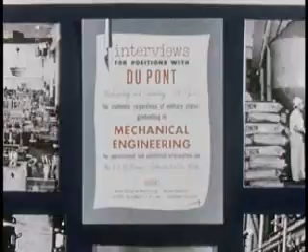This motion picture has been made to help you men who have chosen mechanical engineering as your profession. Perhaps you've considered working for a chemical company. Perhaps, like some mechanical engineers, you've wondered what a chemical company wants with men of your training, whether you'd be working for chemical engineers, or how a mechanical engineer would get very far in a chemical company.

That's why we want to show you something of what goes on at DuPont, where your advancement depends more on your interests and ability than on your field of training.

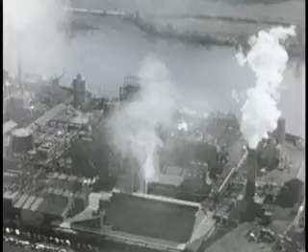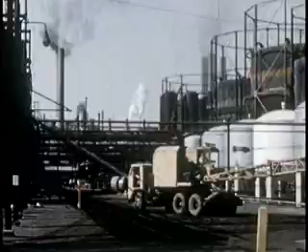Keep in mind throughout this visit to DuPont that the chemical industry is growing by leaps and bounds. Just to give you an idea, at DuPont, in the first 5 years after World War II, over $700 million were invested in the manufacturing side of the business. There are now more than 70 plants in 25 states. No one can tell where the end is, but every year new and more complex products come out: new fibers, new finishes, films, dyes, plastics, agricultural products, just a few examples.

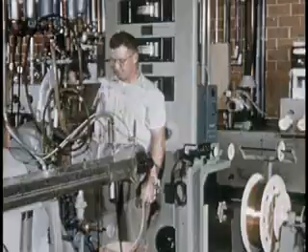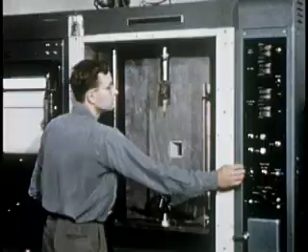Before making any one of those products commercially, a mass of mechanical problems first had to be faced, appraised, and solved. And here's something important to keep in mind: at DuPont, mechanical problems are solved by mechanical engineers. The company does practically all of its own engineering work, right from the very beginnings of fundamental research.

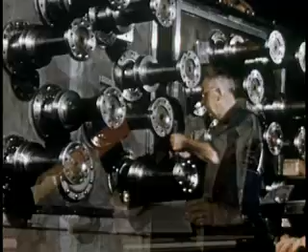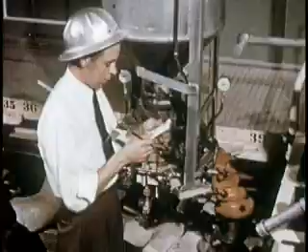It not only develops process equipment, but actually makes a substantial part of it. DuPont men work continuously on ways to improve existing equipment. They design and build the plants, carry on the maintenance, and supervise manufacturing.

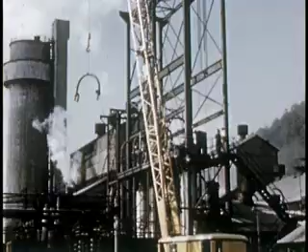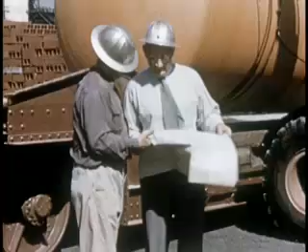Let's consider the opportunities available to you here. Is research and development your special interest? Or machine design? Maybe you're the kind of fellow who goes more for that. How about plant engineering, including power, maintenance, design, and construction? Or production supervision? Perhaps you lean toward this kind of work with its handling of people.

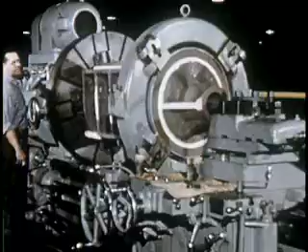Let's start with research and development. Some of the work is done here at the experimental station. A mechanical engineer in this field develops mechanisms used in making the company's products. His work may result in a massive piece of equipment like this, or in a delicate instrument like this one.

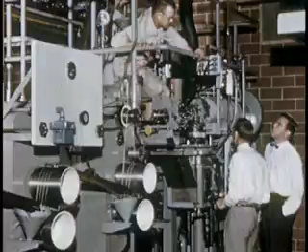There's never been a shortage of problems for research and development engineers. They run into the thousands, actually. They may lead to original equipment to meet new and specific needs, or to improvement of machines already in operation. Let's look at a few examples.

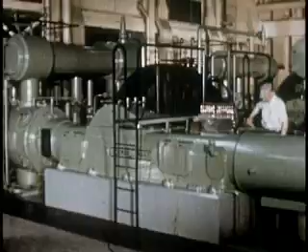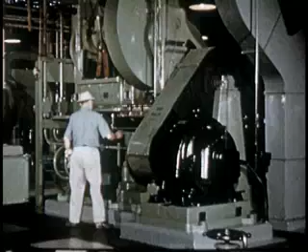These huge compressors are used in making urea from carbon dioxide and ammonia at high temperatures and pressures. Ammonia pumps like this can deliver about 100 tons a day. At these high pressures, machine work, alignment, and assembly are extremely important. Tolerances are severely narrowed as pressures climb.

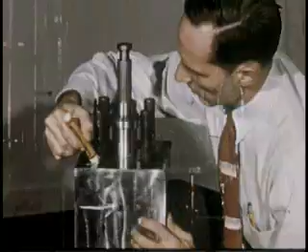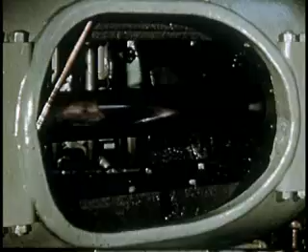One of the secrets of this type of high-pressure work is the action of the pump plunger in the packing. Specification of the right plunger material is essential. High-pressure design calls for great pains to avoid stress concentration, such as might occur in sharp transitions at corners. Pulsations at high pressures cause rapid fatigue of materials and give rise to many design problems that fall strictly in the mechanical engineer's lap.

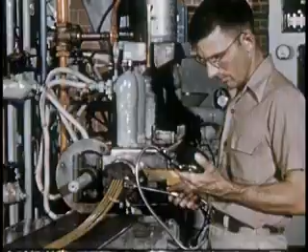Now here's a machine used in the plastics industry. It's called an extractor extruder. It melts plastic, takes the solvent from it, and extrudes it in one operation. To adapt it to DuPont plastics, or to scale it up or down, called for studies in power requirements, heat transfer, and fluid flow.

In other cases, engineers often design and develop equipment for use by DuPont customers. Here are two young engineers working to improve a machine that simultaneously forms and expands a tube of plastic material.

Or a fellow may get into a project that requires work at super pressures. Here's a field that's really challenging, and young too. Behind a steel and concrete barricade, equipment can be tested at pressures far beyond those used in manufacturing today.

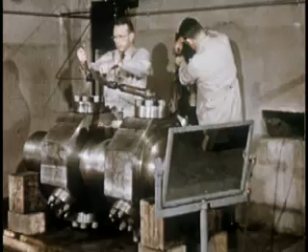After strain gauges have been attached to the test piece and the pressure lines connected, a mirror is placed so that an engineer can observe the results of the test through a periscope on the other side of the barricade.

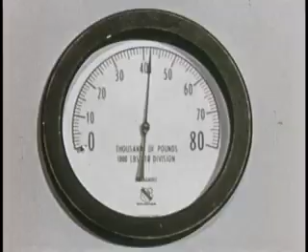There will come a time when pressures far beyond those of today will be used—20, 30, 40,000 pounds per square inch. These men are getting ready for the time when pressures even higher than this may become part of industrial practice.

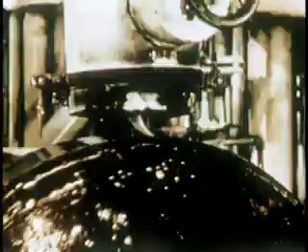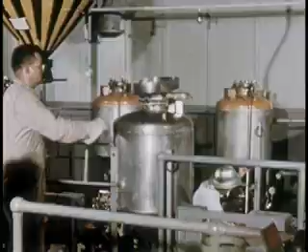When a process or product worked up by chemists moves out of the lab, teams of mechanical and chemical engineers take over. For example, here you see molten nylon being solidified on a semi-works casting wheel at an early stage in the development. Many mechanical problems had to be solved before nylon was produced successfully, and naturally, mechanical engineers had a big part in solving them.

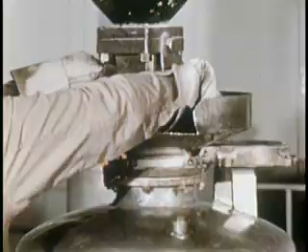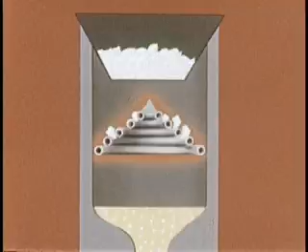Just how would you go about melting nylon chips at several hundred degrees Fahrenheit with as little decomposition as possible? Well, mechanical engineers designed and tried quite a few types of melting grids. Some of them didn't work as well as others, but they finally came up with a grid that did the job.

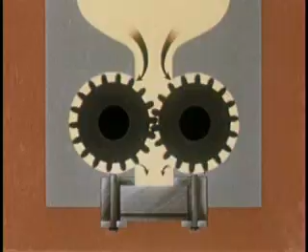Mechanical engineers designed a precision pump that works at pressures better than 1,000 pounds per square inch, but not before they licked the problems of gasketing, sealing, and materials.

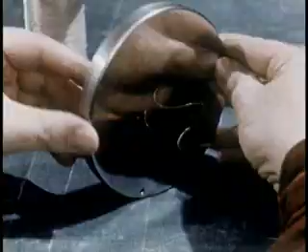The hot melted nylon solidifies into filaments as it is pumped through holes in the spinneret that are almost too tiny to see. Naturally, that spinneret isn't a standard item either. It had to be designed.

Nylon fibers are sometimes wound on these spools at a rate of 1,000 yards a minute. How would you go about winding yarn at that speed without any deviation in yarn tension? Sound like an interesting problem? The fellows who developed this traversing mechanism certainly found it so.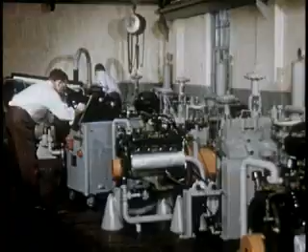Let's move on to this petroleum laboratory to see another important part of development work, activity devoted to improving existing processes and products. Here, engineers are constantly trying to improve the chemicals DuPont sells to the petroleum industry.

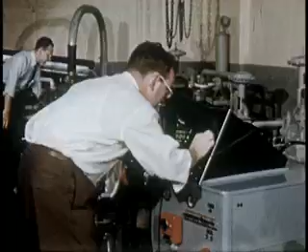Here, engineers are studying exhaust condensates that indicate the effects of tetraethyl lead. Engineers study these things in the laboratory.

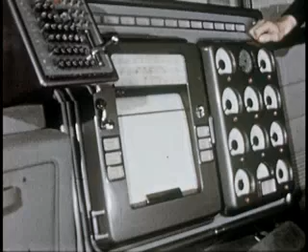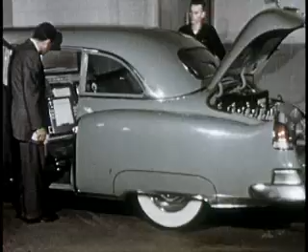They study them out on the road, too, in passenger cars, in trucks, through tests under various kinds of rigid control situations. The instruments in this test car indicate and graphically record information on such factors as horsepower, fuel consumption, speed, spark setting. That's the way mechanical engineers, working with chemists, arrive at conclusions which result in better and better engine performances.

We have seen that research and development includes developing new process equipment and improving existing processes. It also includes design. The engineering department handles design work for most major projects. In some cases, it is machine design. In others, process equipment design. But always, it is the work of teams of engineers—mechanical, chemical, electrical, civil, and so on.

Normally, these are men who make their careers in engineering. They work with engineers from the manufacturing departments to design plant equipment and machines.

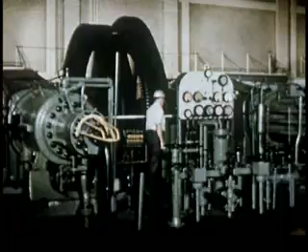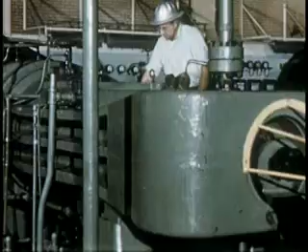For an example of major design, how about this huge hypercompressor? It builds gas pressures from 450 pounds to 12,000 pounds in 3 stages. When these compressors were built, you just couldn't buy equipment like it, so DuPont engineers pitched in and designed their own.

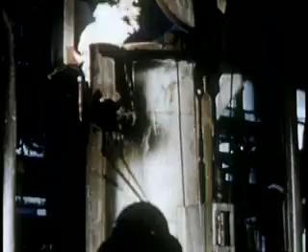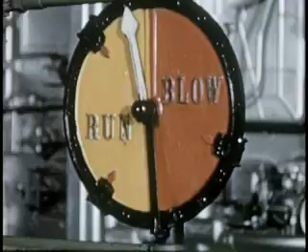Or maybe you'd like to roll up your shirt sleeves on one like this—adapt standard equipment, such as this water gas generator and its control mechanism, to DuPont's ever-changing needs. Over the years, more than one mechanical engineer has thought hard on this one. There she goes.

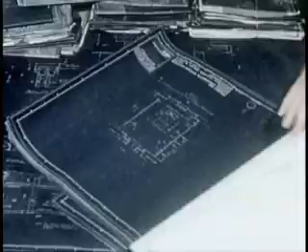These are just a few of the problems mechanical engineers work with at DuPont. They are typical of the work in research and development. Multiply them by 100—no, better make that 1,000—and you begin to get an idea of how important mechanical engineering is in this chemical company.

Another important phase of mechanical engineering is plant design, layout, and construction. Most companies use outside architects and contractors for this work, but DuPont does all its own.

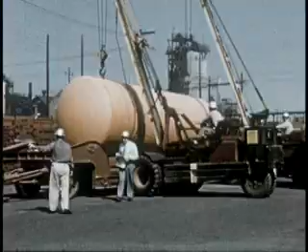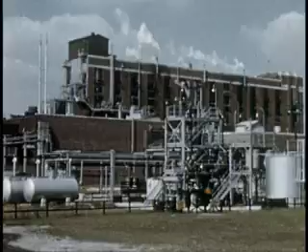Often the engineers who supervise the construction of the plants also stay on to help get them going. Of course, the design of services to go along with the buildings and machinery is included in their activities. For instance, this nylon manufacturing plant.

These ducts are part of an air conditioning system DuPont mechanical engineers help design. During the manufacturing process, air is required at 5 separate temperatures and humidities. That's right, 5. That sort of a problem interest you?

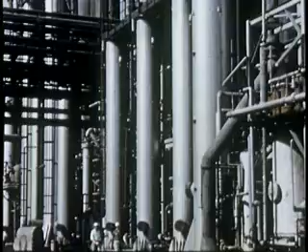As you can imagine from the size of this compressor, air conditioning is a pretty important item in many of DuPont's 70-odd plants. Or say you were tackling this problem: scrubbing carbon dioxide out of a gas mixture.

These towering scrubbers work at about 400 pounds. The pressure at the scrubbers forces the solution up the side of a mountain. Here in this tower, the pressure is released and the carbon dioxide passes off to the air. The natural fall of the water gives 200 pounds of head that doesn't have to be supplied when the water is recycled. That's both equipment and plant design in a big way.

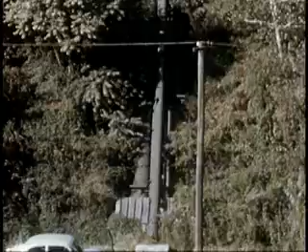Speaking of design, how about control instruments? That sort of work interest you? They are very important in plant design, and the advances in this field have been tremendous. As a matter of fact, control instruments today are practically a must for nearly every phase of manufacturing operation because they've come to mean so much in terms of safety and economy.

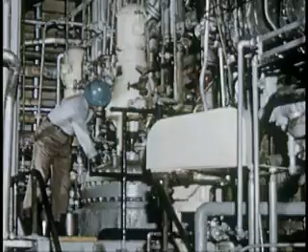Take a look at this maze of pipes, for example. To get maximum production yields, reacting chemicals must be brought together under conditions as nearly ideal as possible. All steps in the process must be smoothly coordinated.

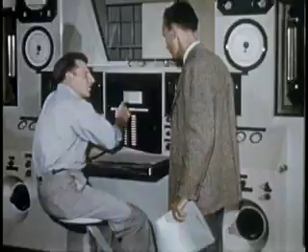Actually, some processes of today couldn't operate with instruments of 10 years ago. It's a fast-moving, intensely interesting field. If this kind of work appeals to you, whether you tackle it from the plant design end or from the development end, instrumentation offers tremendous opportunities.

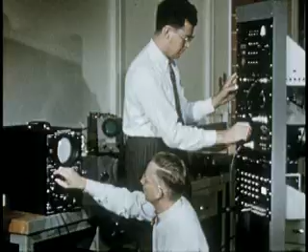Still another field for mechanical engineers at DuPont is plant engineering. This is a fairly broad field, including maintenance and power. It also includes design and construction on sub-major projects that may involve process improvement or plant expansion.

Nearly all chemical manufacturing operations must run in mechanical equipment: tanks, kettles, presses, pumps, valves. And this equipment gets heavy use, much of it on a 7-days-a-week basis. It's bound to wear out, and that means maintenance.

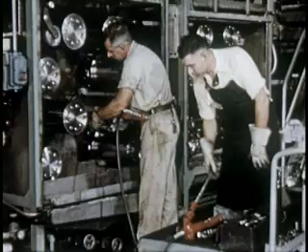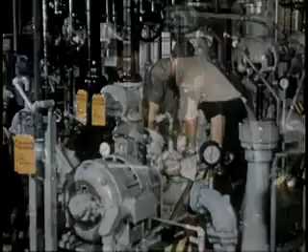Part of maintenance is keeping equipment in top mechanical shape, catching trouble before it catches you. Supervising this work calls for real ingenuity, and it involves real engineering ability. Then there's the maintenance of pumps, gearboxes, automatic lubricators, and a great variety of complex equipment and process machinery. Here again is a supervisory job for alert engineers.

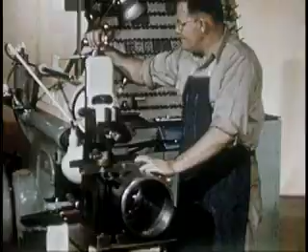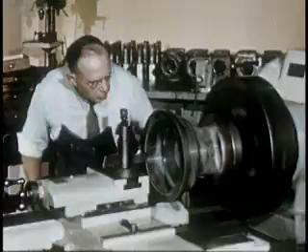Helping with the maintenance work are the machine shops at many DuPont plants. The needs of some of these shops are always changing. That means an almost continuous program of mechanical study ranging from layout and scheduling to working up shop standards.

Now, let's say your major interest is power. Power is as essential in a chemical plant as it is in any other kind. And the power problems that arise from some of DuPont's complex operations are about as challenging as can be found anywhere. Power engineers at DuPont must supply steam, electricity, water, air, refrigeration, and other services under a variety of conditions.

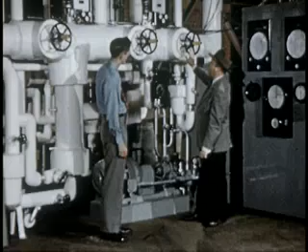Look at this steam-reducing station. It is one of several operating at various pressure differentials. They supply steam at the right pressures and temperatures over a wide range of capacities, from 1,000 to 20,000 pounds per hour in short periods of time.

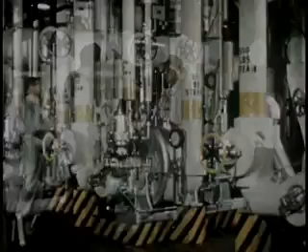Boiler feed water pumps, compression distilling units, fuel pumps. Almost all power plant equipment needs plenty of engineering know-how to avoid interruption in these essential services.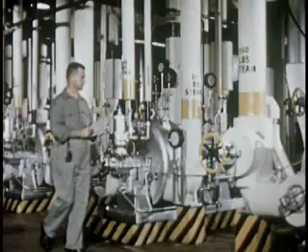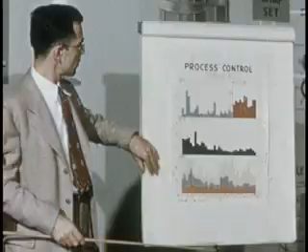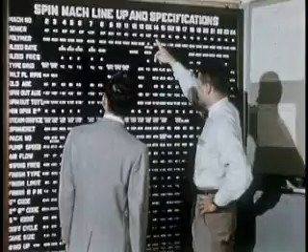Production supervision is another major activity at DuPont for engineers who like to work with people but still want to put their technical training to good use. The duties are broad and cover all phases of plant operation. Such a job might well include setting up efficient maintenance schedules for equipment, keeping production rolling, maintaining quality, reducing waste, and at the same time, building employee morale.

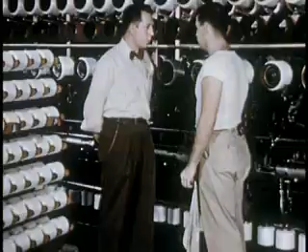Quality production is determined by individual workers. Each must understand the importance of his job, and it's up to the production supervisors to develop this understanding. The mechanical engineers and others who advance in this work train both wage roll and professional employees in manufacturing processes and the use of equipment, an important responsibility.

They also work with development engineers in plant technical sections and the central engineering department. Here their knowledge of the manufacturing process is used in working out designs for process improvement or new plants. In all cases, the planning and conduct of a continuing program of training in safe working practices is an important part of supervisory work. Raw material scheduling, quality standards of intermediates and finished products, handling employee suggestions, all are part of the work in production supervision.

The Mechanical Development Laboratory is evidence, too, of how important mechanical engineering is at DuPont. A principal activity of the laboratory is to develop and build full-scale automatic machines to be used as models for those in manufacture.

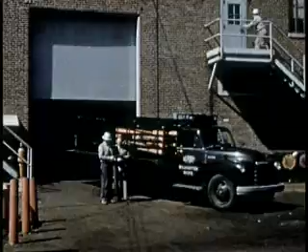The Wilmington shops are still further evidence. They make special equipment and machines for company use. They are among the most completely equipped in the country, and it's all top-notch equipment, ranging from small bench lathes to large diameter boring machines.

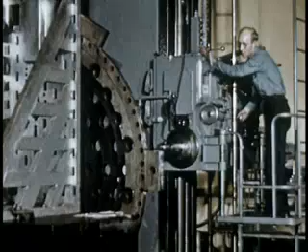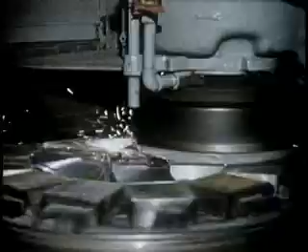Notice that this radial drill press has built-in pits for deep drilling. And how often do you see a 50-inch magnetic chuck? Makes possible the grinding of filter press plates and frames.

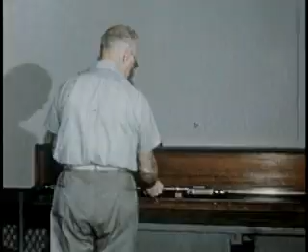Here's something else, a 12-foot vernier gauge that, in spite of its size, is as accurate as the best of the smaller ones. This optical comparator shows up errors on machining as small as 2/10,000ths of an inch. And here's a micro drill that puts holes in hard metal so small that you have to use a microscope to get a good look at the hole it drills.

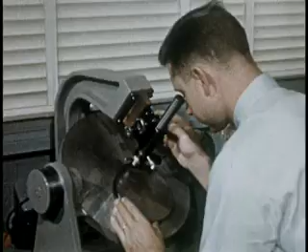Yes, a mechanical engineer has quite a bit of elbow room around here with all this equipment to serve him.

Now that you have an idea of what does go on in a chemical company, you can see that instead of no opportunities, a mechanical engineer has many opportunities to use his abilities and training, and in many fields. Because DuPont's 10 manufacturing departments operate to a large extent as 10 separate companies, the way a man heads towards his goal varies from department to department.

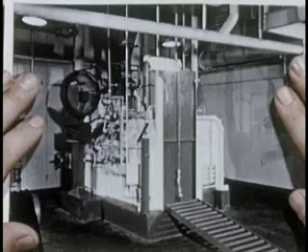You might start off working with a man who has had many years of practical experience. You collect material, assemble data, make calculations. In other words, learn the ropes. Gradually, you'd take on more and more responsibility until you've had enough experience to size up a problem, develop a method of attack, lay out a schedule, determine costs, and see the project through. In short, be on your own.

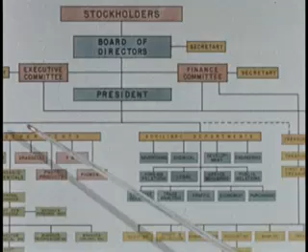In the manufacturing end, DuPont has several types of training programs. You may begin on an informal basis in a plant, as with some departments, or you may attend a formal training program that includes conferences on leadership, procedures, employee relations, company policy, and safety. In either case, you have every opportunity to get a broad picture of the company, as well as to learn your job. But regardless of which way you go, you'll find vast sources of information for your use.

Fine libraries with technical, trade, and patent literature. Over 100 engineering consultants within the company, each an expert with years of experience. Metallurgy, stress analysis, power, lubrication, instrumentation, yes, even meteorology.

At DuPont, there is a never-ending need for better machines, better ways to do new things to meet the challenges of the future. Research and development, design and construction, production supervision, and all phases of plant engineering unite to meet these challenges. Mechanical engineers work with each other and with specialists of many other fields towards a single objective: better living for mankind through new ideas, new methods, new products, and improvements on existing ones.

There are many opportunities to contribute to this objective. And while doing so, there is the opportunity to express your creative talent and ability, to accept real responsibility, whatever your field of training. Yes, in such an environment, you can look to a bright future with confidence and optimism.